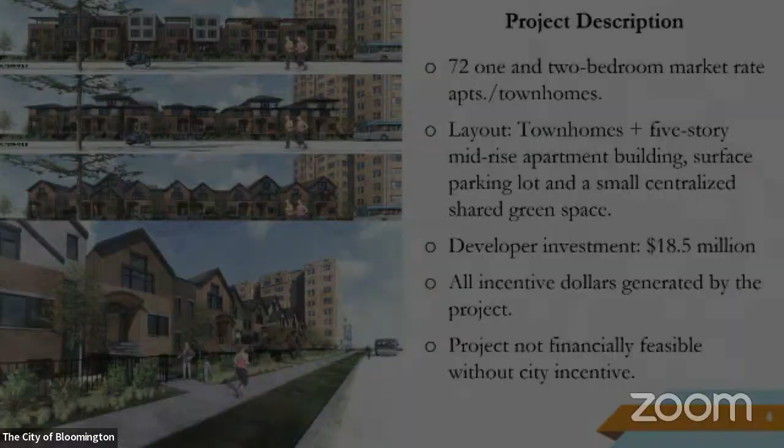In terms of the terms: this agreement would utilize 75% of that increment that is generated, plus the short-term rental tax rebate, to reimburse the developer for eligible TIF project costs. That means you can't simply use these funds to pay for anything—there are certain costs that are TIF eligible, like property acquisition, planning, and costs to rehab and redevelop a site. A portion of that increment would be utilized to provide that reimbursement.

25% of the increment generated would be placed in a fund for other uses. One thing you often hear is that you don't want to negatively impact school districts with TIF districts. State statute allows for a portion of those funds, if generated, to be utilized to help school districts in the event they are impacted by the development—meaning if there are new school-aged children living in this incentivized development, the school district can receive a level of reimbursement to help with those costs. So those are the structured terms of the proposed agreement.

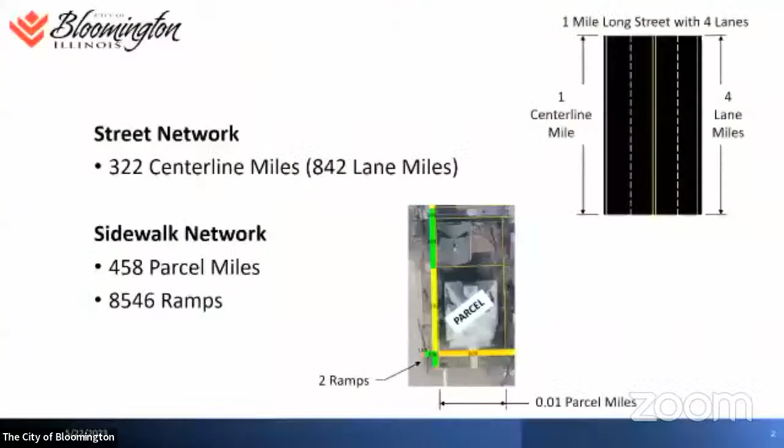So when we look at our network in total, we have 322 centerline miles. A centerline mile is down the center of the street, as shown in the example upper right. That converts to 842 lane miles. A lane mile is one lane. In the example on the right, you see 4 lanes, which would mean 4 lane miles in a 1 mile length. So from this point forward in the presentation, we'll be referring to lane miles when you see stats.

The sidewalk network has 458 parcel miles. When we assess our sidewalk network, we use parcels, like property parcels, so we look at the totality along the parcel instead of individual panels. The other example is a corner with 2 ramps. In total, we have 8,546 ramps throughout the city.

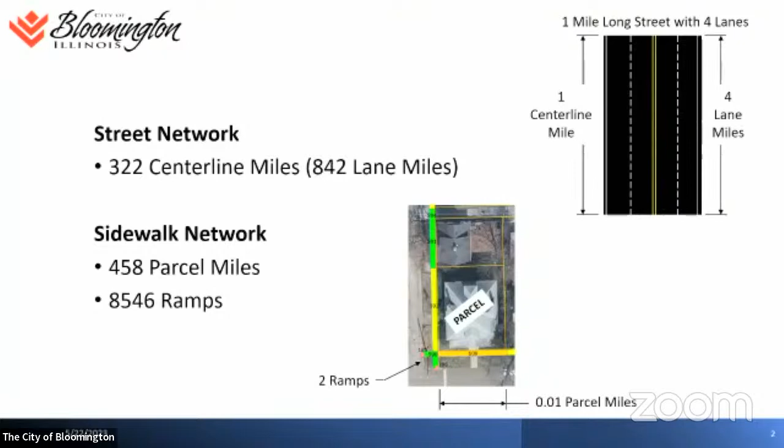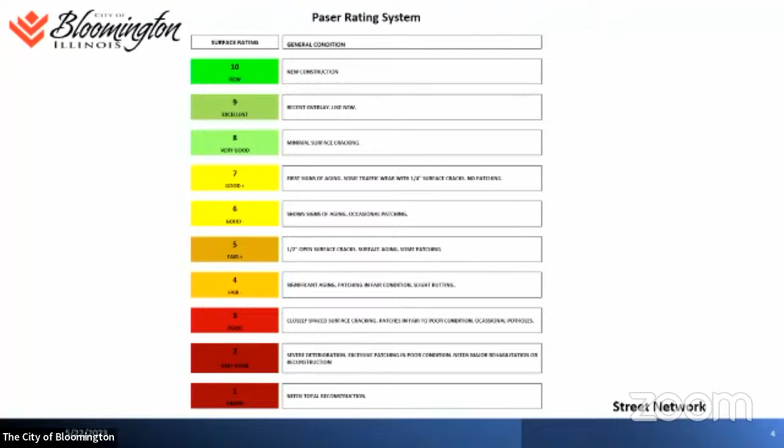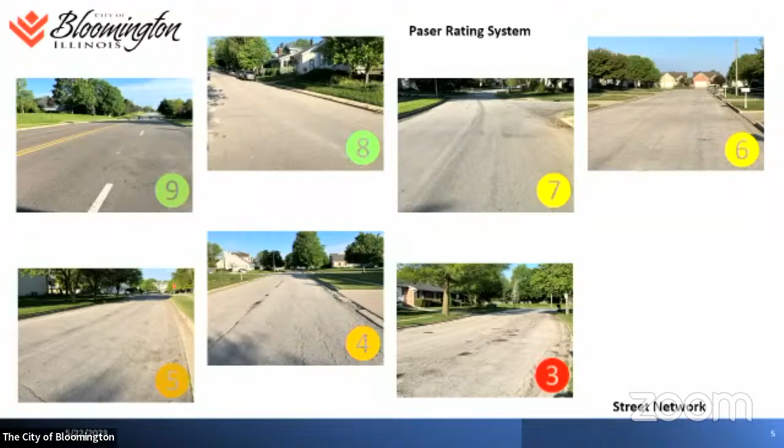Next slide, please. These pictures are representative samples of asphalt streets within our community. Upper left, number 9, is generally a new overlay in really good shape, and we go all the way down to number 3, which is poor condition with a lot of potholes and cracking throughout the streets. In the middle are the different ranges when we look at street condition.

We've noticed, and it's no fault to anybody, but we get different viewpoints on what that windshield survey is, and different times of the year when it's done. We feel that moving to future automated systems is probably the best procedure going forward.

Right now we're looking into a pilot program with a company called Tiger Eye that matches up with the software program we use to develop our program. They're looking at about a $70,000 commitment. Now that may sound like a lot, but with high resolution vans, something could be had in the neighborhood of $400,000 or $500,000. So this modified version is a lot more cost effective than it had been several years ago.

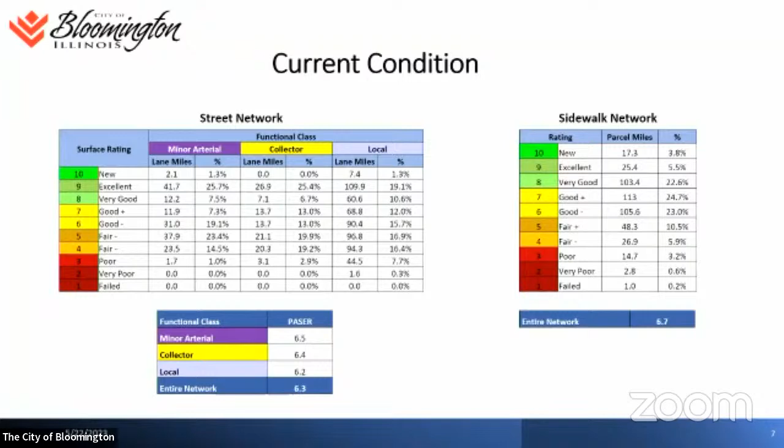Next slide, please. So this is a table with a lot of colors, but it basically shows what we know today, given the windshield surveys we've done. What's important to note is that about 40% of our network is in the fair to poor range, generally speaking. The sidewalk system is in a little bit better shape than the roadway system, about 18 to 20% in the fair to poor range. Overall, the street network is about a 6.3, at the bottom end of good. The sidewalk network is a little bit better, closer to the top end of good, what we call good plus.

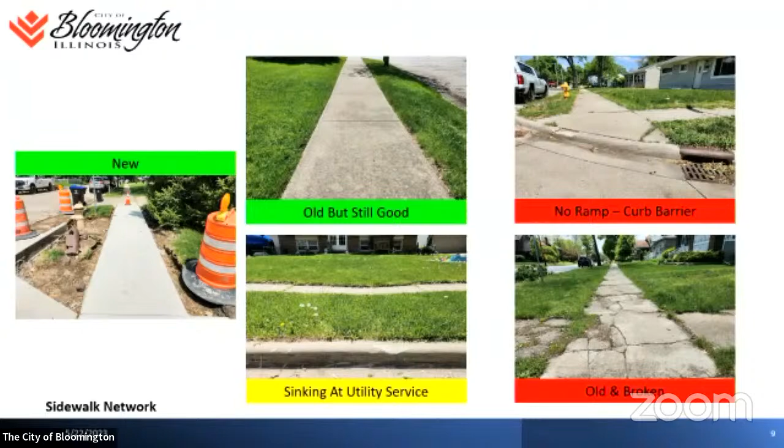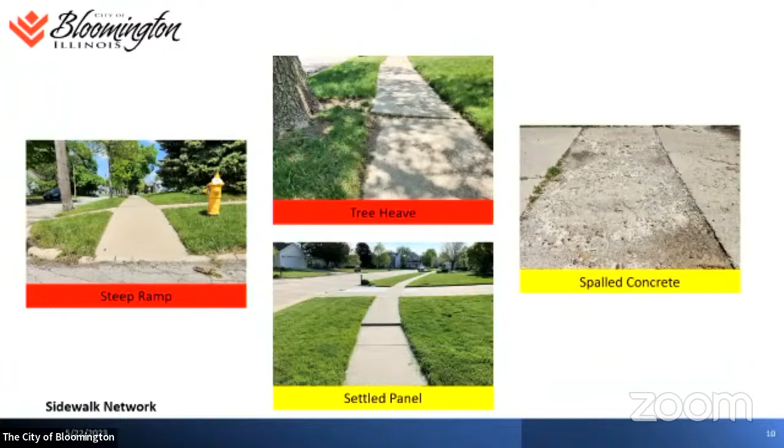Next slide, please. These are further examples: steep ramps on the left, tree heaves—we have a fair amount of tree heaves throughout the city—some spalled concrete, which is a material issue, and then settled panels, which mainly occur in the newer parts of the city.

Next slide, please. So what we've got here is a pavement deterioration curve. What causes pavement deterioration? There are primarily six causes: traffic loading, environmental or climate influences, material quality issues, construction deficiencies, drainage deficiencies, and utility cuts. Basically what you're seeing in the blue line is that when a pavement is newly built at year zero, it's a 10, but through time, as we move along that x-axis to the right, the pavement begins to deteriorate, hence those pictures you previously saw.

So if we don't do anything to the pavement, likely by the time we're at 20 to 30 years, we're in really poor condition. With the language in the middle, we use different types of treatments. We use a rejuvenator, which I'll talk about later—that's a lower cost option. As you move along the curve to the right, there's a slurry seal product we're looking at doing here in Bloomington for the first time, and then we have our stone matrix asphalt and hot mix asphalt resurfacing. The price increases per square yard as you move along, and ultimately we get to reconstruction if we don't do anything, which is quite costly.

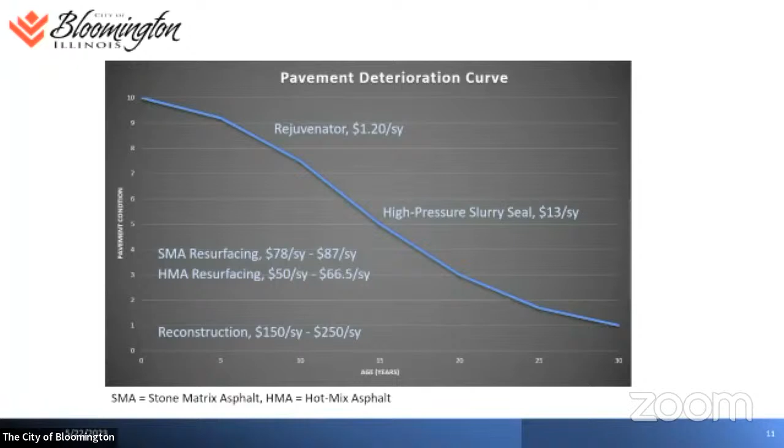The primary philosophy we try to manage our pavements with is to keep the good roads good. Back in the day when I first started, it was a worst-first philosophy—whatever the worst roads were, that's the ones you went to. What's been found through time is that it's very difficult to get yourself out of a hole by doing worst-first solely. So there are different strategies we'll talk about later, but keep that in mind as we move through the presentation. Next slide, please.

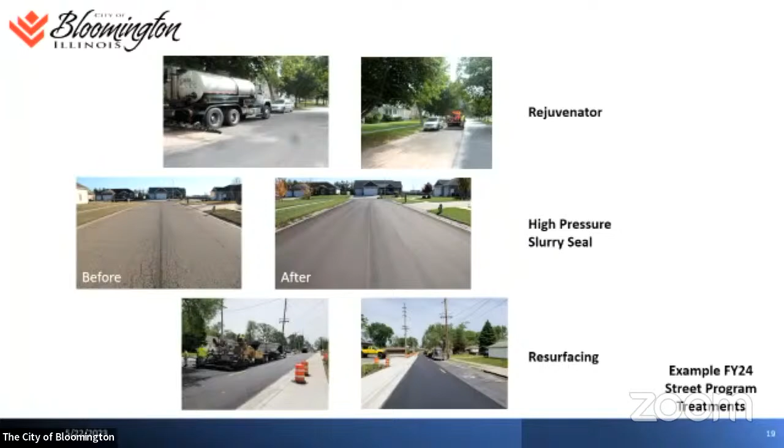This is an example of a corner treatment. We've all seen ramps on the corners, but there's a lot of work that goes into just putting in a ramp. When we do a ramp, we do the curb and gutter at the corner, adjust the inlets—sometimes removing and resetting them—and then find that the pipes need to be reworked. We drop the grade down on the ramp to meet ADA, and sometimes we have to put a yard curb in the back. What you see on that screen is about $7,300 worth of work.

Just to give you a relative number, and think about it—we usually do that on all 4 corners of an intersection. Next slide, please.

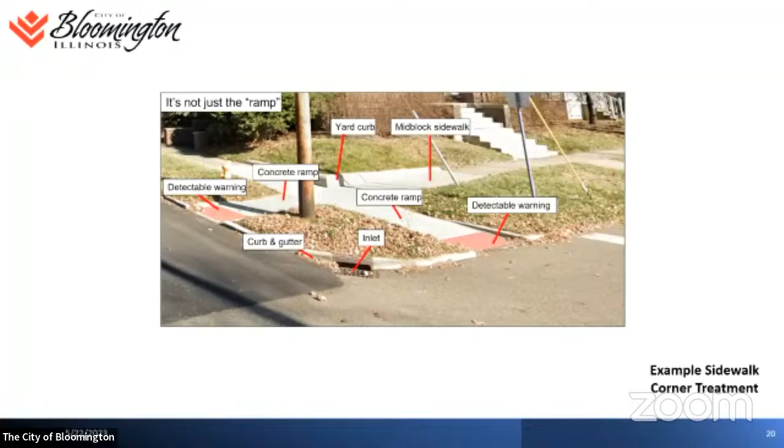Some of the highlights: we're going to resurface Towanda up by Country Financial. We're going to do Washington Street by Washington Elementary School as you turn the corner on Towanda and head towards downtown. I've been heavily involved in the downtown project, and one thing we learned through cell phone data was that the highest amount of traffic volume in and out of downtown comes through Washington Street, believe it or not. We thought maybe it was on 51—it's not, it's actually Washington Street.

And likewise, Oakland, down by Oakland School—that pavement is not in really good shape at all. It's breaking down, and we're going to have to go in and do severe patching there.

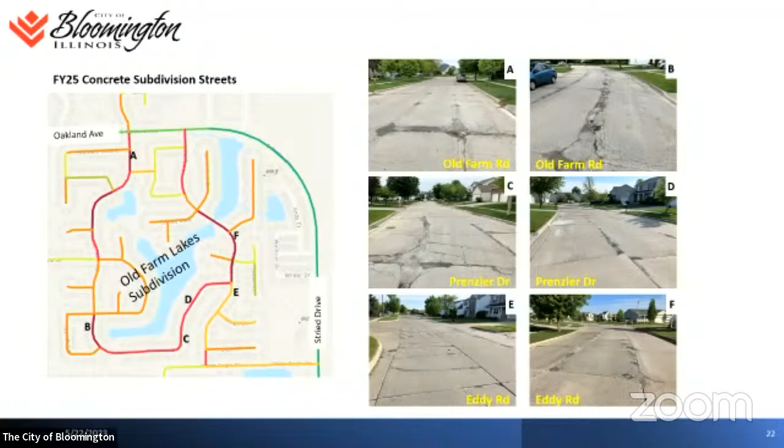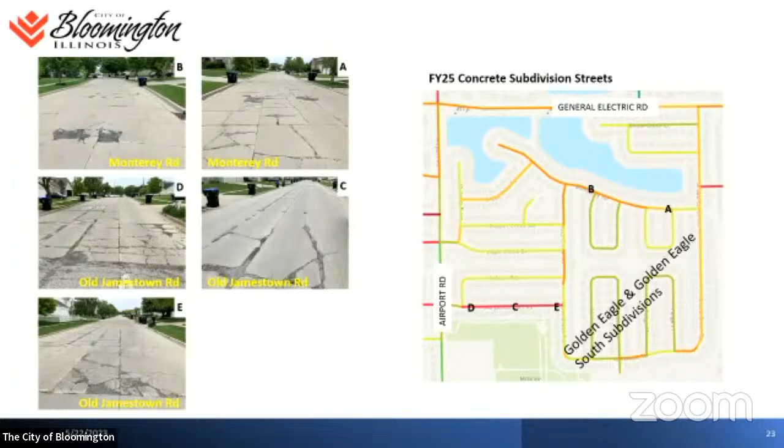Also within the Golden Eagle and Golden Eagle South subdivisions, you see some select areas that are really in poor shape—just not acceptable, we've got to address it. What I'm seeing here indicates remove and replace, so we'll probably have to spend money to take it out and put it back. In other areas where we can salvage the pavement, we may go in and do spot repairs and then overlay it with asphalt. Next slide, please.

I'll hold a second on Golden Eagle—that was built in the late 90s, so we're looking at about a 25 to 26 year life. We want to at least get 40 to 50 plus, so we're not getting the lifespan we should be getting from a concrete pavement. Back to the Old Farm Lakes, that's about 29 to 36 years old, so we're getting a better life—it's just that people are having to drive on rough pavement.

So what's the schedule? We think again it would be wise to go with 2 phases for our general resurfacing and sidewalk projects. We did that in FY23 and it worked out well. Phase 1 was let out with SMA. We've only got 1 producer within our region that produces that product. We broke out a smaller hot mix asphalt contract to see if we could get other bidders, and we did. We got some folks to come in that hadn't bid in quite a while.

So that was successful, so we think we'll take that same approach again. This year with phase 1, instead of seeking a bid waiver, we're going to put it back out to the market and see what the market gives us to test. If in turn we just have that 1 supplier, then we'll probably come back for a bid waiver in the future.